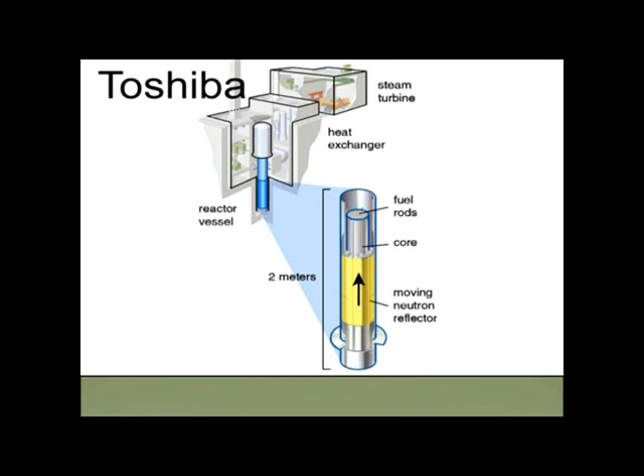This was mentioned by David Sarnoff, who's a Russian immigrant who developed RCA, the radios and the radio network, and eventually the TV and the TV network. Now, Sarnoff liked to be called General Sarnoff because of his service during World War II. And General Sarnoff's prediction was that by 1990, we would all have a nuclear power source in our basement.

Well, instead we have computers in our basement and Blackberries in our pocket. So it shows that we can quickly adapt some things, but we didn't quickly adapt the nuclear reactor in the basement. The nuclear reactor is placed in a bored hole in the ground about 100 feet deep.

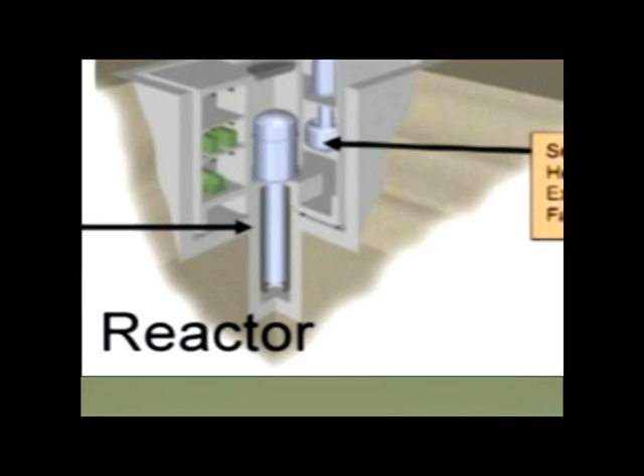The reason for this is one of those engineering problems like cooling and lubrication - that's the radioactivity. Now, radioactivity occurs naturally.

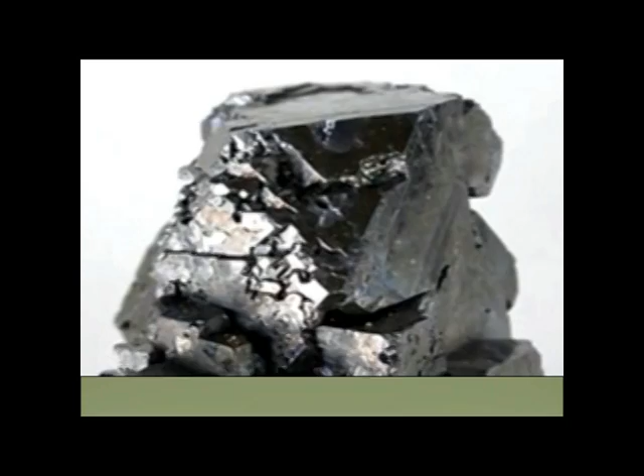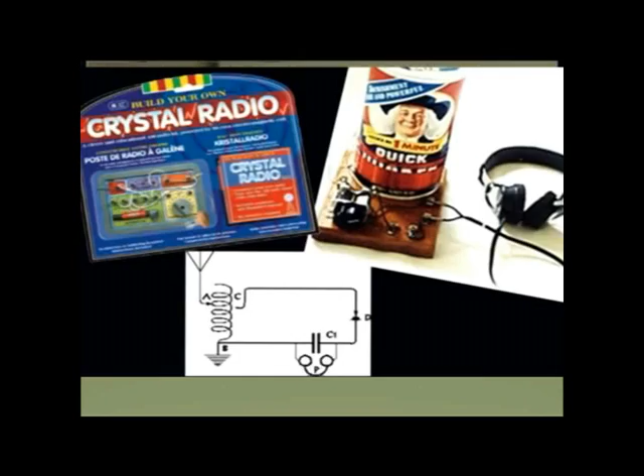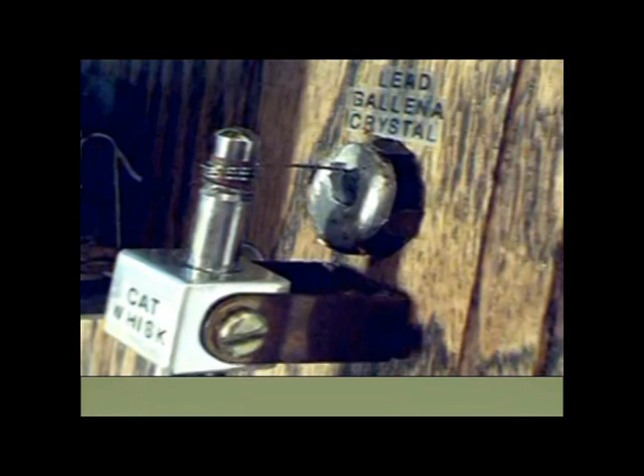When I brought this up to the board, I wondered how many of the board were familiar with the natural radioactivity in a crystal of galena, which was part of what we played with as boys as a crystal radio. It turned out all the board was familiar with that - that surprised me. Anyway, the way you find this radioactivity in the crystal of galena is to go over the crystal with a cat's whisker. You were wearing earphones, and you would know you found the area of radioactivity when you could hear a radio station on your earphones. The young people today call these pods, but they're the same thing - earphones and pods are the same thing.

The radioactivity in the nuclear reactor is a byproduct of the reaction. What is happening is that we're converting matter into energy, and it takes a very, very small amount of matter to make a tremendous amount of energy. The matter in this case is an isotope of uranium.

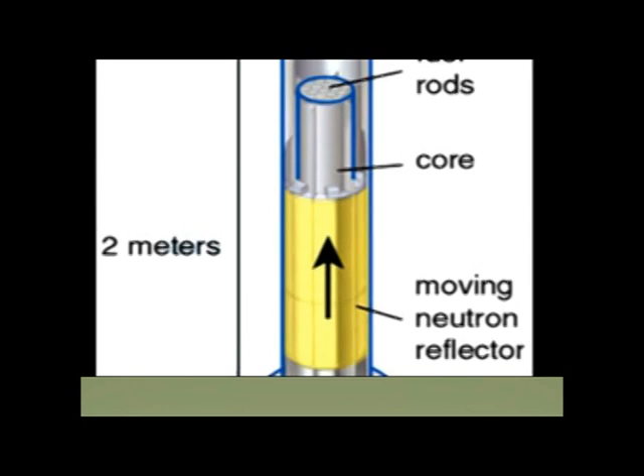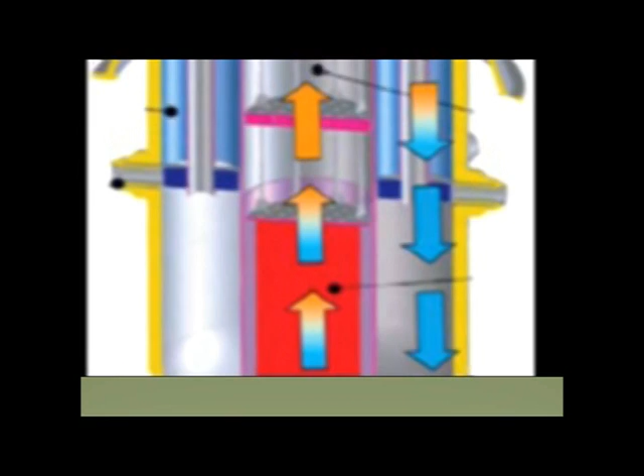The location of this reaction is - assume we start at the bottom - it slowly moves up the whole 6 feet or 2 meters, and all this time, day and night, 24/7, it's generating heat in a quantity of 10 megawatts. This reaction continues until all of the matter is used up.

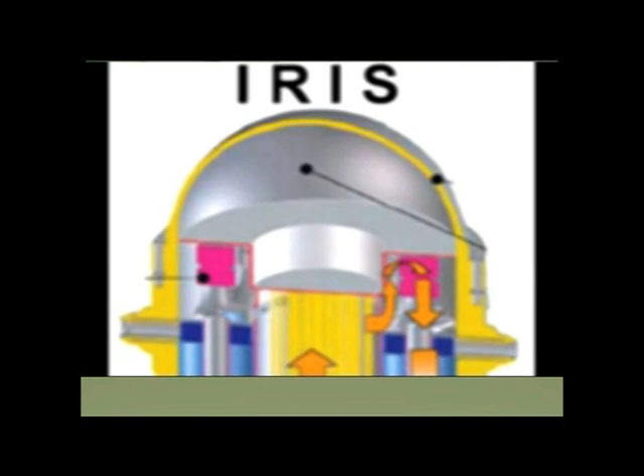On this 6-foot device, it's used up in about 30 years. All during this time, you're making that amount of energy. At the end of 30 years, you can either pull this thing out of the hole and recycle it, or you can fill up the hole and dig another 2-foot hole down 100 feet. No big deal.

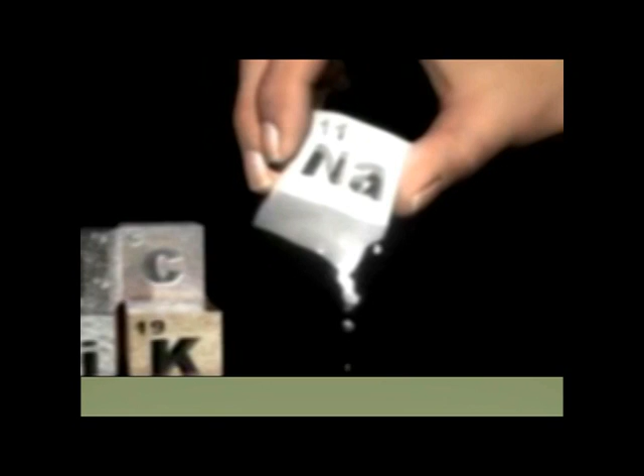In order to get the heat to the surface, you use sodium instead of water. Now, sodium is a common liquid metal which doesn't boil, and it does exhibit the properties required for this thermal siphon principle. This metal is very hot - it's 1,032 degrees Fahrenheit. I can't quite describe how hot that really is, but it opens up with that temperature all sorts of opportunities for mechanical and chemical processes.

In its simplest form, it would go into a boiler to make steam. The steam could be used in earth-moving equipment or heating, electricity - many, many uses for steam from boilers. In addition, it can make heated air. This heated air can be put into a jet engine.

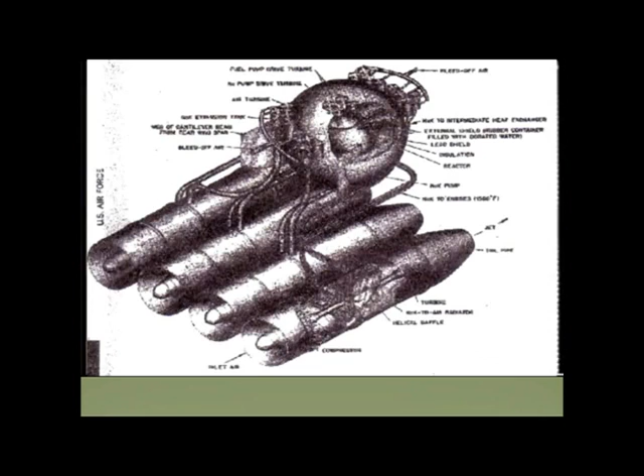There are processes to use this temperature to directly produce hydrogen, which gives you the opportunity to feed fuel cells. The hydrogen, if you don't need it or the energy for anything else, can be stored so that you have the ability of storing energy.

All these things are very useful when you want to put people to work, and what the work is will depend on what the locality is. In the city of Galena, one of the logical things is to refine the mineral galena and make lead.

But whatever else, it's giving people jobs and work in an area isolated from everything else. This problem of isolation affects people in the United States strongly because of transmission losses for electricity produced in power plants. Transmission losses in this country amount to about 15% of the output of the power plant, whether it's a hydroelectric plant or any other plant. Just getting the electricity through the copper wires causes the wires to heat up and the power is lost, all the way from the power plant to the alarm clock on the bedside table. These losses are very significant.

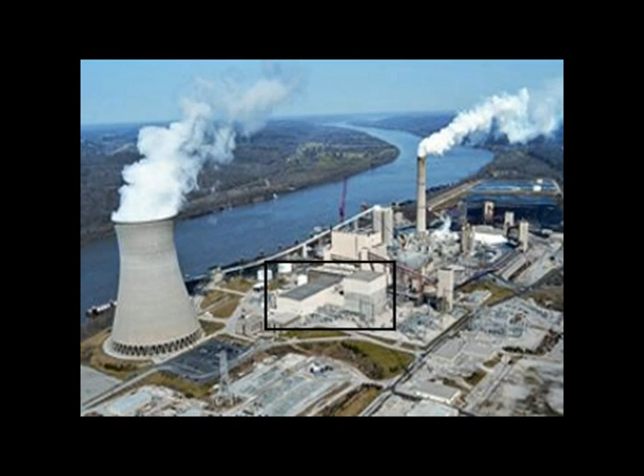I worked there during construction, never worked there as an operating plant. We want to tie this to where we were then and where we are now. The plant as it was, that picture was actually taken probably in '77, '78 when I was working there. One of my fellow employees rented an airplane, went up and took a picture, and you see what we have down below. It's quite a mess. This little part here is what would have been there had it stayed a nuke. Everything else you see is there for one purpose and one purpose only, and that's to burn coal. That factors into the whole thing about waste, which I'll touch on a little bit later.

Things that have changed to get us to this point. We had a little discussion at lunch about this, a little bit of definitions. You'll hear things referred to the certification and approval process.

What we now have in front of the NRC is the GEs, the Westinghouses, the Toshibas, the Arevas of the world have developed plant designs and presented them to the NRC. They're in the review and approval process, and once those things are approved by the NRC, anybody who wants one can buy that design, and it's licensed.

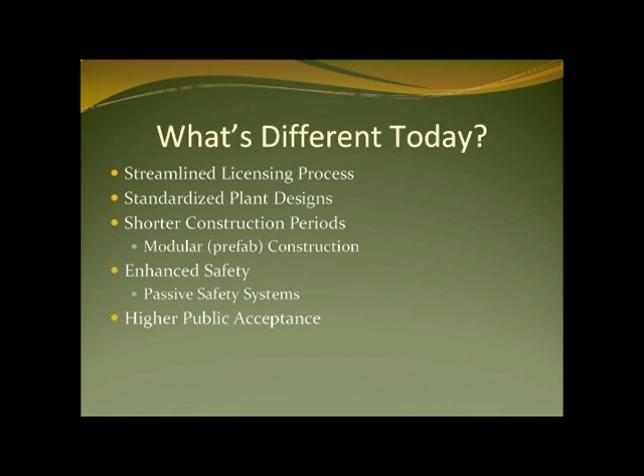Just as a general look at one of the pre-approved designs, the Westinghouse AP1000. I'm not going to get into a lot of nuts and bolts, though. As Lee said, I could talk for hours. I promised I wouldn't. The AP1000 is actually under construction right now.

There's a site near Augusta, Georgia. The Vogtle site has 2 operating units on it. They are doing their early site work now.